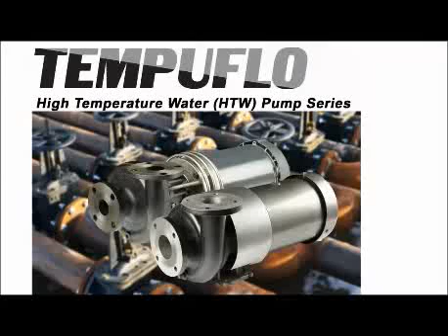The HTW was released by engineering in 2015, just recently. The pictures you see here are the first production run of the HTW pumps. The picture on the left is without the shield, showing the heat exchanger coil, which is the one major piece that makes the HTW possible. The picture on the left shows the HTW 80, and the picture on the right with the shield shows the HTW 300. These are the first production run of this series, the HTW, expanding the Tempuflo line.

This heat exchanger coil, which we'll show in greater detail later, takes water from the sealed chamber and circulates it around the heater coil and back into the sealed chamber. We'll explain this in greater detail later, but I wanted you to be aware of what you're seeing here.

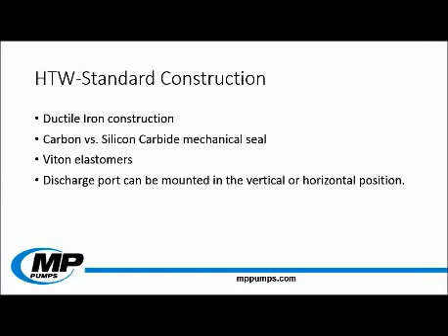This has a very durable design, coming in standard ductile iron construction. It also comes with our severe service seal, which has materials of carbon, silicon carbide for the mechanical seal, and the O-ring seals are Viton elastomers. As always, you can change the orientation of the discharge on these pumps, from a vertical or a horizontal discharge position.

This is showing you the difference. The 80 and 120 come in 2 different variations. The 180 and 300 only come in ANSI 150 class flat flanges, but the 80 and 120 come in NPT as well as the flat flange choice. This is still offered in all of our variations. The HTW will be offered with C-face electric motors, also without the electric motor, known as the PumPak, or with a pedestal mounted bearing unit.

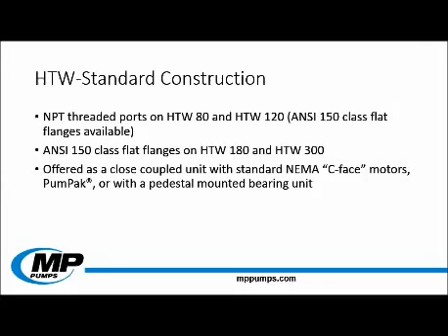The HTW line of pumps is self-aligning, in that you don't have a long coupled design. Being close coupled gives you this self-aligning attribute, due to the close tolerances put onto the adapter, housing, and impeller to allow it to be self-aligning. With a long coupled unit, you'd have a bearing assembly, pump, and electric motor that you'd have to align with a coupling. This close coupled design eliminates all of that.

This unique patented design features high temperature, low thermal conductivity materials. All of this, combined with that heat exchanger coil, reduces the amount of heat loss and keeps the bulk temperature in the main region of circulation of the fluid you're pumping, and out of the seal chamber. With this series of pumps, we can process temperatures up to 400 degrees Fahrenheit.

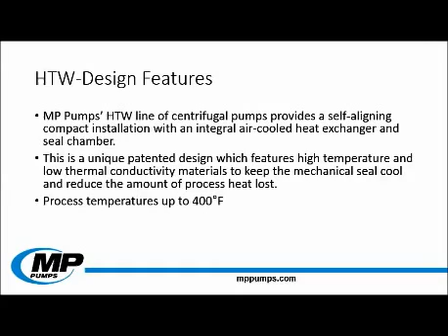But there are some other things that made the HTO line good as well. Like I talked about before, this is a close coupled design, meaning the electric motor directly drives into the pump itself. This is accomplished by close tolerances on the adapter and the housing and all the other components that drive this concentricity.

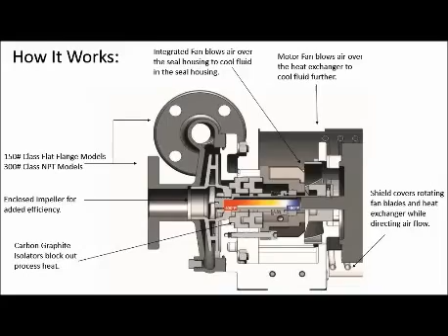You'll also find prints, installation prints, and exploded parts views with the full parts list for these series of pumps. You'll be able to see all the information you need, as well as specs on the heat it can take and anything else you need. If there's something you don't see here, please contact customer service and we'll answer any questions this does not answer.

We also offer 3D solid modeling for those who want to integrate a solid model into their 3D software for their assembly and for designing their system itself.

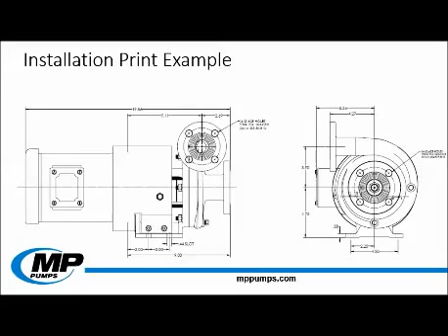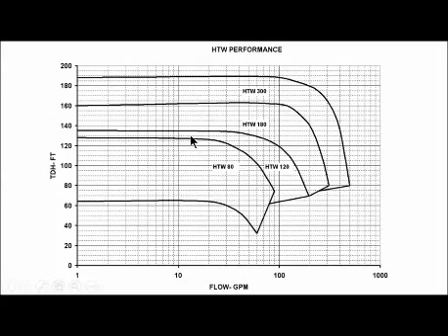This is flow on the bottom x-axis in gallons per minute, and pressure or total dynamic head on the y-axis. Once you establish where you need to be with your system, you can quickly figure out which pump best suits your needs.

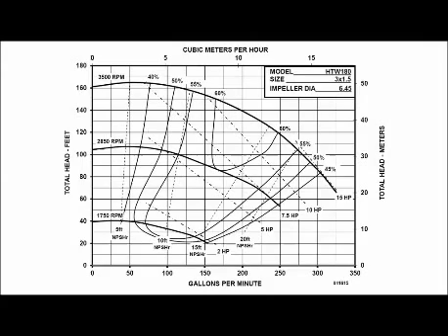What this curve is showing is the performance you can expect from our system, taking the bulk temperature into our seal cavity temperature. The bulk temperature, or the temperature you'll be pumping in your system, is listed on the x-axis on the bottom in degrees Fahrenheit. The y-axis, on the other hand, is what you would expect to see if you had a temperature gauge in the seal chamber itself, the seal temperature, also in degrees Fahrenheit.

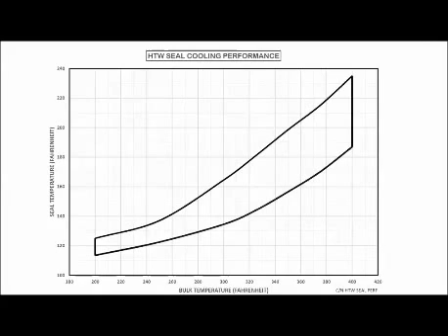So for a given bulk temperature, what is the range I can expect to see depending upon factors of what my seal temperature will actually see? This range is based upon all of the HTW pumps, and they all have slightly different seal temperature performances at a given bulk temperature, which is why you can see the range here as well as varying performances. But this range shows seal temperature versus bulk temperature.

What this is showing is the overall limitations of our HTW pumps. How high in temperature can you go, and how high of pressure can you go? On the x-axis we're showing temperature in degrees Fahrenheit, and this is the bulk temperature of your system, not the seal cavity temperature.

And what can the bulk pressure be as well? The answer is the highest limit is different depending on which pump design you get or want. This HTW 80 is on the top, and HTW 120 NPT is on the top. The differences are the style of the housing itself.

The NPT design actually bumps it up into the ANSI 300 class. The flange is a 150 class, so that gives you a difference in limitation, and the difference in limitation is also restricted to the mechanical seal itself.

Each mechanical seal, depending on its size, has a limitation of maximum pressure that it can handle. The smallest seal can take the greatest amount of pressure due to its surface size. So the HTW 80 actually has the highest pressure rating at a given temperature that it can accept.

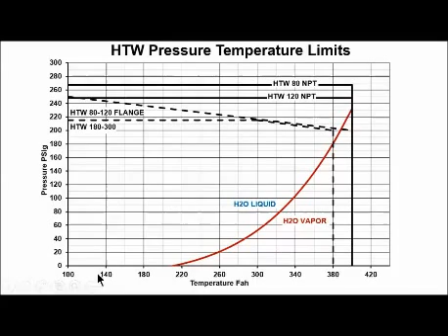This is just a quick chart, and it's a great chart - you will be able to have this available as well for you guys. This is just a quick reference chart, showing what are the general sizes that you can expect for each pump design, giving you the suction and discharge size, and then the size of the impeller itself, and what they're offered in as far as flange design on the housing.

Also, what electric motors can be hooked up to these pumps. This helps especially when you're buying a pump pack design, and if you already have an electric motor on your shelf, this will aid in which pump will be able to hook up to that electric motor. It also shows you the maximum capacity in gallons per minute and the feet of total dynamic head that you can expect out of each design.

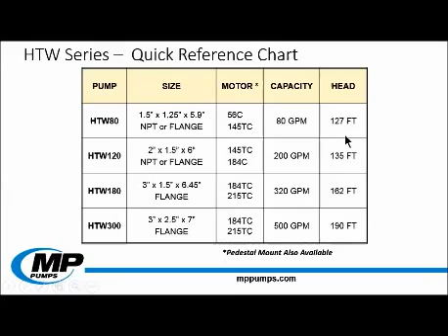Now, what are some of the benefits that you can expect from the HTW line of pumps? Like we said before, this has all the benefits that you're used to seeing with the HTO pumps. But with the heat exchanger added, this reduces the seal housing temperature to increase mechanical seal life. The cooler we can keep our mechanical seal, the longer it will last.

All these things combined, we've seen anywhere from 60 to 80 degrees change with the heat exchanger coil added. We did a test where we valved off the heat exchanger while running and allowed it to maintain an equilibrium temperature, then turned it back on and allowed it to maintain equilibrium again. This showed us how effective the heat exchanger coil really was, because it showed with and without flow through there how effective we were with just the addition of the heat exchanger coil.

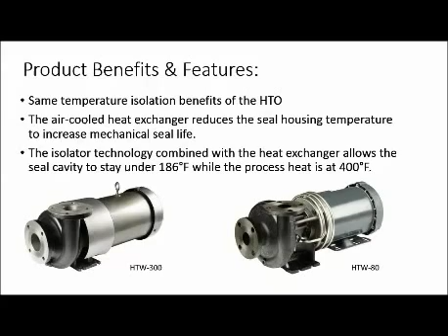So with this isolator technology combined with the heat exchanger, the seal cavity can stay under 186 degrees Fahrenheit while the process heat is at 400 degrees Fahrenheit bulk temperature. What these two pictures are showing again is the HTW 300 and the HTW 80, the first production models that we've created.

Now what's the difference? What's setting us apart from the competition? The HTW pump is going to save you in water cooling cost. A lot of the competition's designs will actually have an external seal flush. This external seal flush adds extra and unnecessary parts to your system, and that extra water going through your system could lead to calcification in your plumbing. All these cooling water costs, plus the bill for the extra water being pumped through the system, are all eliminated with the HTW design.

This is an efficient design with the enclosed impeller and everything being close coupled. It is a very efficient pump, and so this will mean less energy costs for the consumer as well.

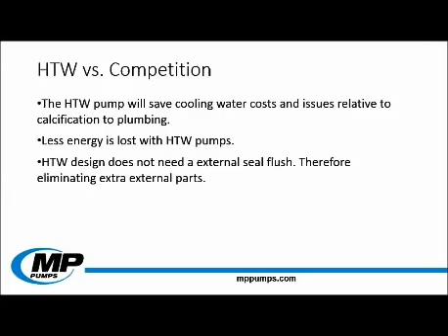Another benefit of having this close coupled to the electric motor, it does not need an internal bearing. The internal bearing is needed by some competitors because of how long their overall system is, and they need to hold up the opposite end of the impeller. The HTW design is very compact and does not require this additional bearing, and therefore is one less part in the system to fail. This is a very efficient design as far as floor space, eliminating the extra wet bearing found in the competitor's design.

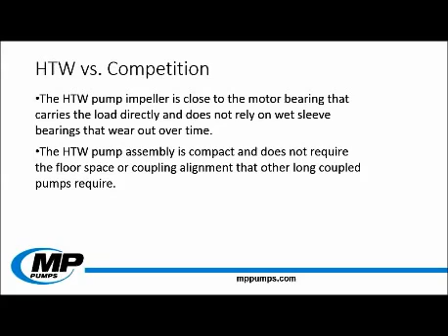Now, what are some of the applications for the HTW? The HTW can be used in various different applications. Why would you use water or some form of water with the HTW? Water itself is extremely good at transferring energy. Its thermal conductivity is very high. When added with other additives it goes down, but it can still be up to 4 times the thermal conductivity of standard heat transfer fluids, and it is very efficient at transferring heat across the system.

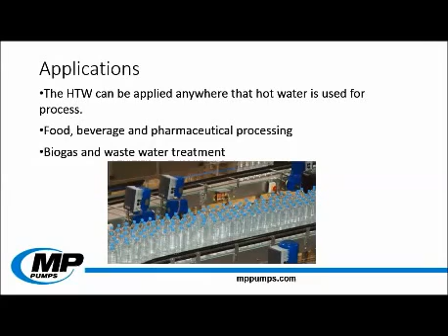What are some of the applications this can be placed in? We don't want to limit what this can be used for, but just to give you some ideas, it could be anywhere that hot water is used for transferring energy. This could be anywhere water is required, like in the food and beverage industry, pharmaceutical processing, biogas, and waste water treatment. There are some instances where you cannot use an oil that could contaminate the system, and you must use something safe. These applications would require an HTW design.

Places that would use this would be hospitals, universities, prisons, and healthcare facilities that transfer energy with water. Chemical processing, commercial laundry, and heating use this type of system. Anywhere that uses energy conversion, where you take a fluid and transfer heat across the system, this is a great pump and a very robust design for these applications.